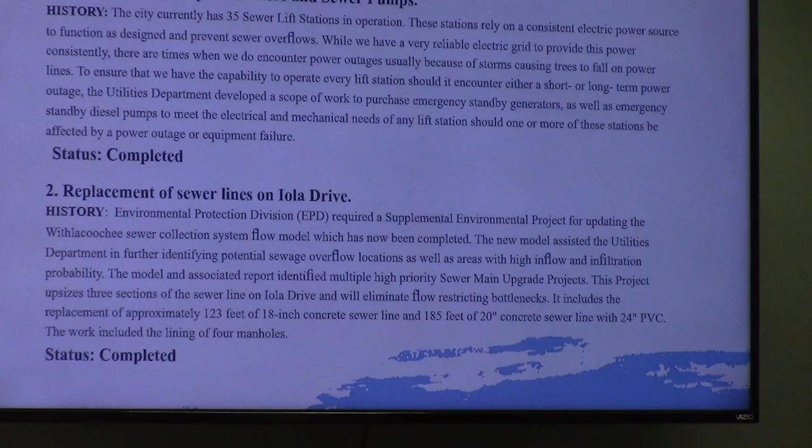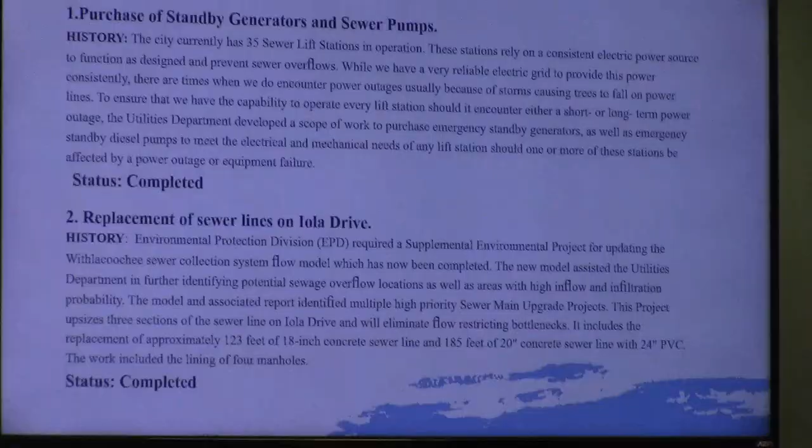As the mayor talked about earlier, this is one of our projects, and you're going to see some of them are completed, some are ongoing. I will get to the ongoing. I will give an explanation of why that's ongoing. Purchase of standby generators and sewer pumps. We have two master lift stations. One is Garnto over there at the YMCA. The other one is Reamer. It's over there in Reamerton. That's our two master lift stations.

We know a lift station is its own facility to be able to force and pump the sewer. If you ain't got gravity, you got to get it there. And that's what lift stations are there for, to force it and then get it to gravity and then go to the treatment plants to be able to treat it before it goes into the river. These stations rely on a consistent electric power source to function as designed to prevent sewer overflows.

While we have a reliable electric grid to provide this power consistently, there are times, as you can see tonight, all of a sudden it was sunshine and then it hit just like that and it's storming and thundering and lightning popping everywhere. There are times that we encounter power outages, usually because of storms; trees falling on power lines is a big one.

To ensure that we have the capability to operate every lift station should it encounter either a short or long-term power outage, the Utilities Department developed a scope of work to purchase emergency standby generators, and some we have, as well as emergency standby diesel pumps as backups. If we have emergencies on our lift station, we got a generator, and if we have to, as a backup for that, we can put a diesel pump in and divert flow. We're not having to spill. So we have completed that project.

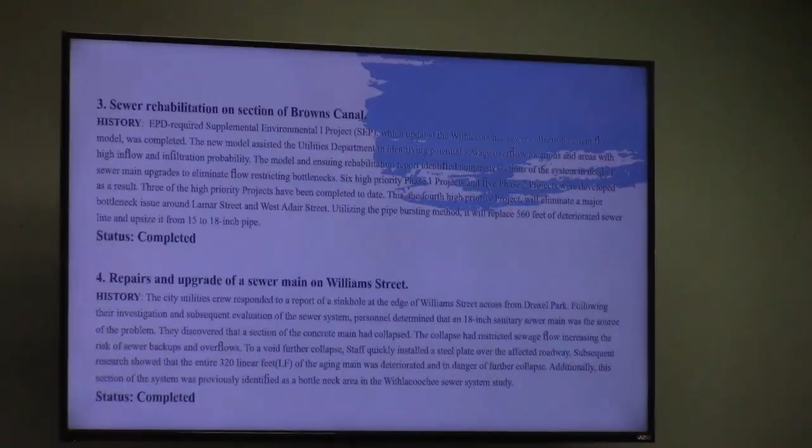Number 3, sewer rehabilitation on a section of Browns Canal. The EPD required supplemental environmental project which updated the Withlacoochee River sewer collection system flow model was completed. This new model assisted the Utilities Department in identifying potential sewage overflow locations and areas with high inflow and infiltration probabilities. You're going to see a lot of these projects; EPD required us to do a project update with a sewer collection system overflow model. So that model had to show all the areas where we were having trouble. So you'll see that a little bit.

But if you read on down to the middle, 6 high priority phase 1 projects and 5 phase 2 projects were developed as a result. 3 of the high priority projects have been completed to date. This was the 4th priority project. It eliminated a major bottleneck issue around Lamar Street and West Adair Street, utilizing the pipe bursting method, and it replaced 560 feet of deteriorated sewer line and upsized it from 15 to 18-inch pipe.

The other thing we look at, if this... projects, we'll go ahead and upgrade that size pipe, because you don't want to have an issue if you got 15, and then you're almost to the end, you ain't got no more, not getting enough flow. That's what's gonna happen: you're gonna have overflow, you're gonna spill. So that's why when we look at these projects, each one, we go ahead and update it and make it a bigger pipe.

Number 4, repairs and upgrade of the sewer main on Williams Street. They basically discovered a section of the concrete main had collapsed. This collapse had restricted the sewage flow, increasing the risk of sewer backups and overflows. The staff quickly got a steel plate over the affected roadway.

It showed that the entire 320 linear feet of the aging main was deteriorated and in danger of further collapse. Additionally, this section of the system was previously identified as a bottleneck area in the Withlacoochee sewer system study that was done, and that was completed.

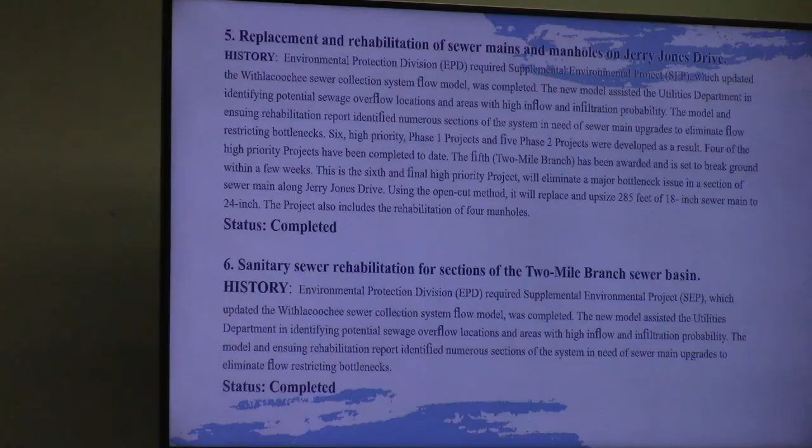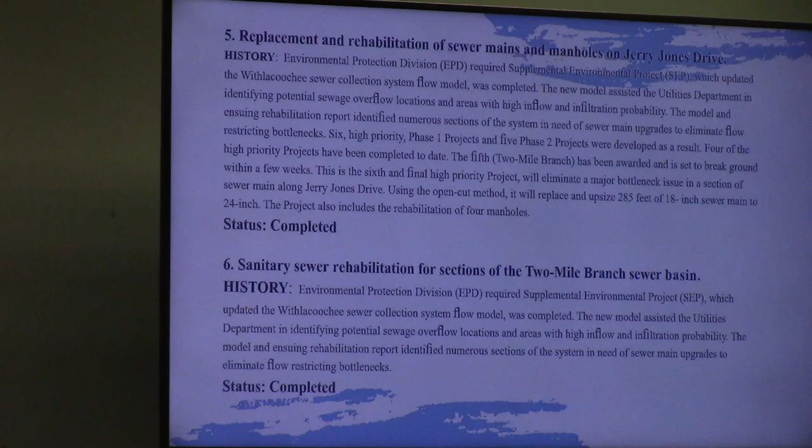Using the open cut method, it replaced and upsized 285 feet of 18-inch sewer main to 24-inch. That project also included rehabbing the 4 manholes. That was completed. Number 6, sanitary sewer rehabilitation for a section of the 2-mile branch sewer basin. Same thing was the model. The model and ensuing rehab report identified numerous sections of the system in need of sewer main upgrades to eliminate the flow restricting bottlenecks.

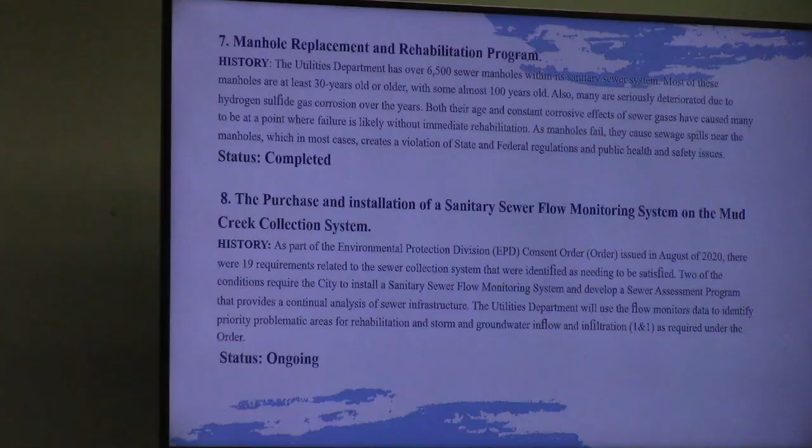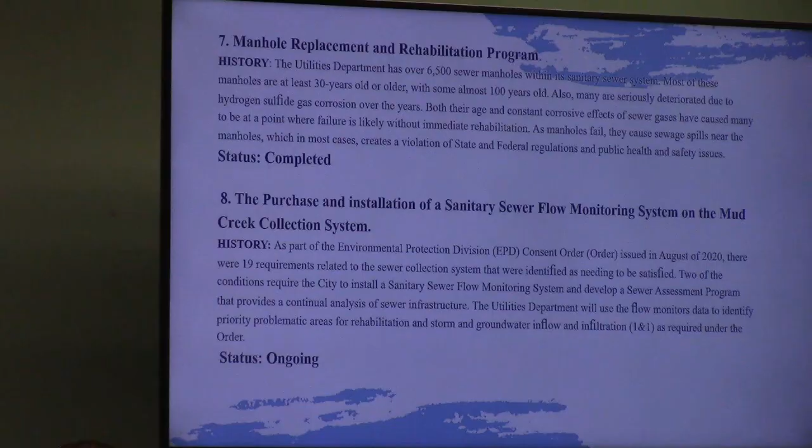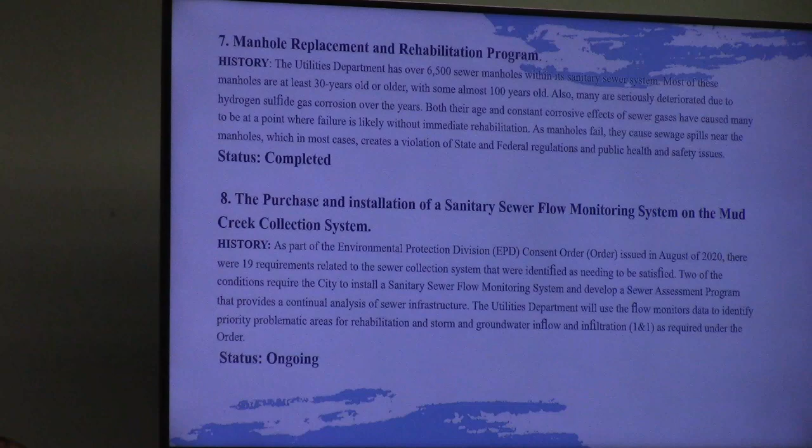Number 7, another rehab and manhole replacement. As I said before, the utilities department has over 6,500 sewer manholes within the sanitary sewer system. And here's a fact of this: most of these manholes are at least 30 years old, with some almost 100 years old. So you got 6,500 manholes, some 30 years old, some almost 100 years old, and trying to get all these lined.

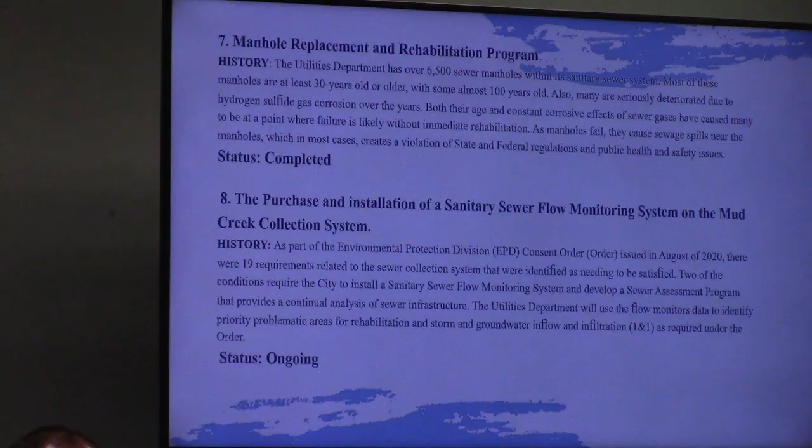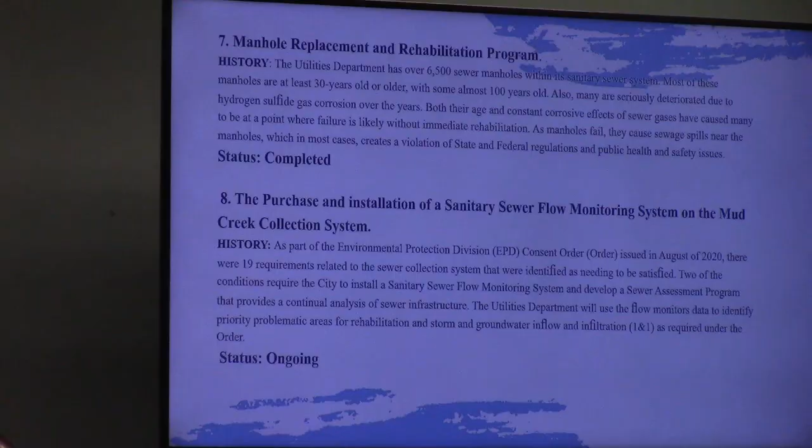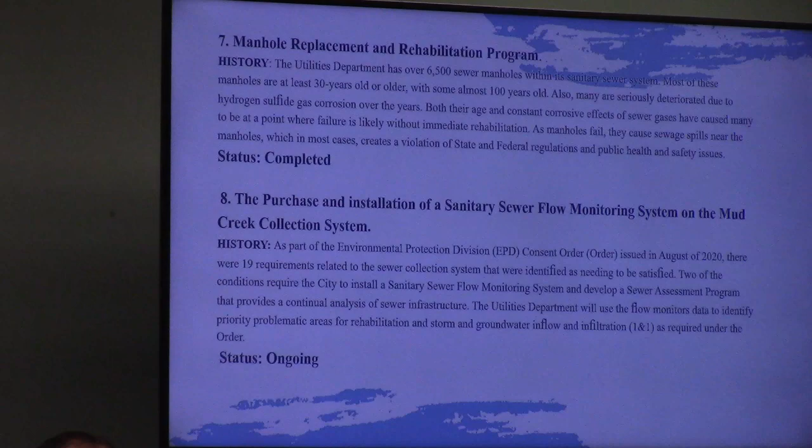If the question is asked, I will go ahead and address this. We have a manhole assessment project in place at the utilities department now. It won't be but a couple of weeks or a month or so, I'm going to take it to the council for approval. What we'll do is we'll get a contractor to go in there, and I think it's manhole number 10 is where we are. That section, we will go ahead and get those manholes back and get them lined.

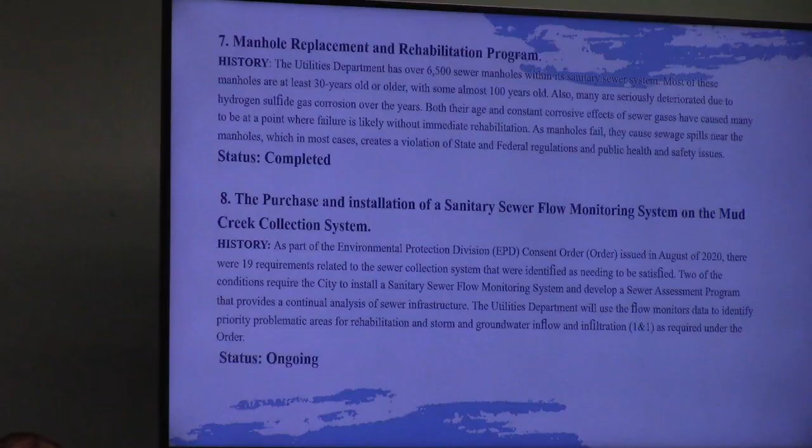The same thing with cured in place pipe. We have a CIPP number 9 project that we're on. That's another one that I'm gonna do. I got 2 separate projects: you got the line cured in place pipe and then you got the manhole. So we have an assessment survey that we have done, we know where we left off, and we're going to continue on doing both of those projects.

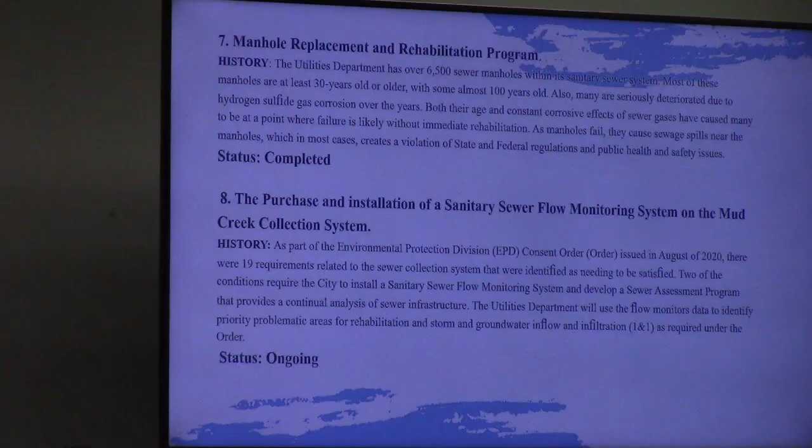So as the manholes, like I say, with some 100 years old, both their age and their constant corrosive environment, the sewer gases, are getting to be a point where failure is likely without immediate rehab. So this is one of the projects we've done that was completed.

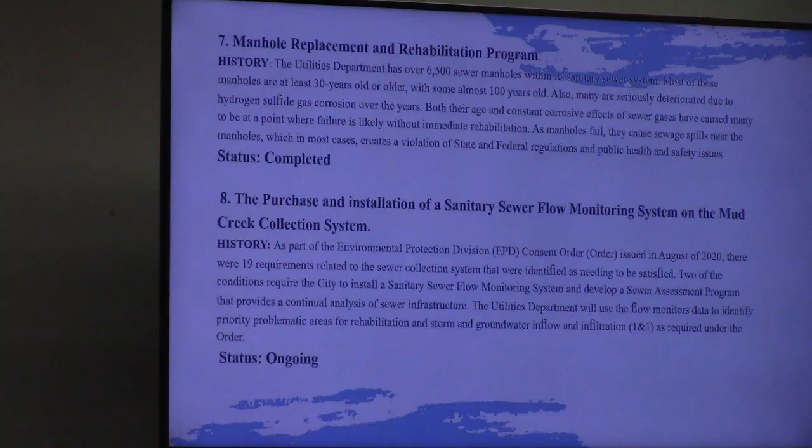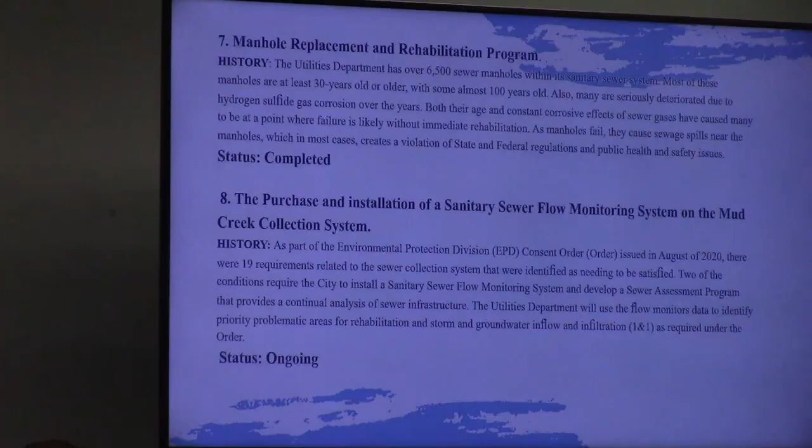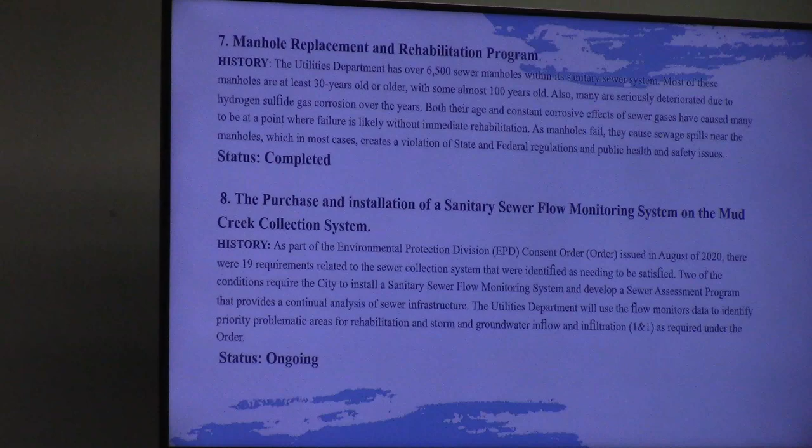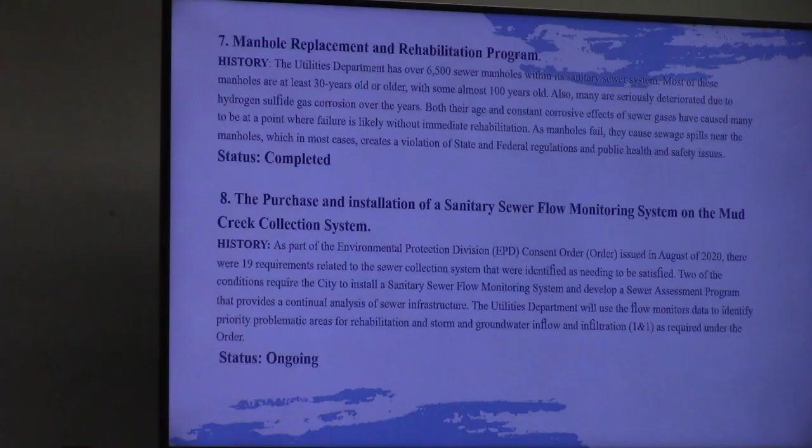Number 8, the purchase and installation of a sanitary sewer flow monitoring system on the Mud Creek collection system. As with EPD, you'll hear this, we are under a consent order that was issued in August of 2020. There were 19 requirements related to this sewer collection system that were identified as needing to be satisfied. 2 of the conditions required the city to install a sanitary sewer flow monitoring system and develop a sewer assessment program that provides a continual analysis of our sewer infrastructure.

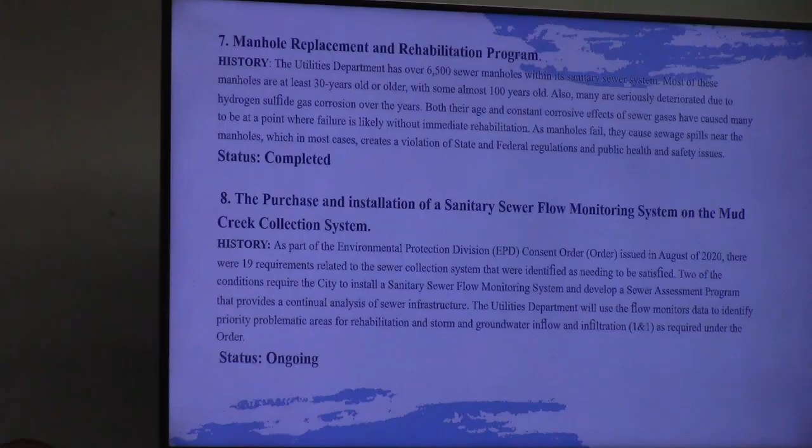And we just looked at basically problematic areas for rehab, storm, groundwater, inflow, infiltration. That was part of the consent order. I will let you know that we are in compliance with our consent order. We're still under that.

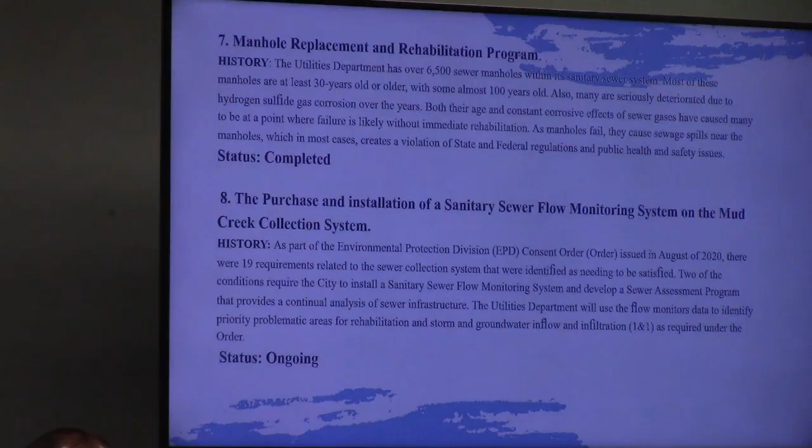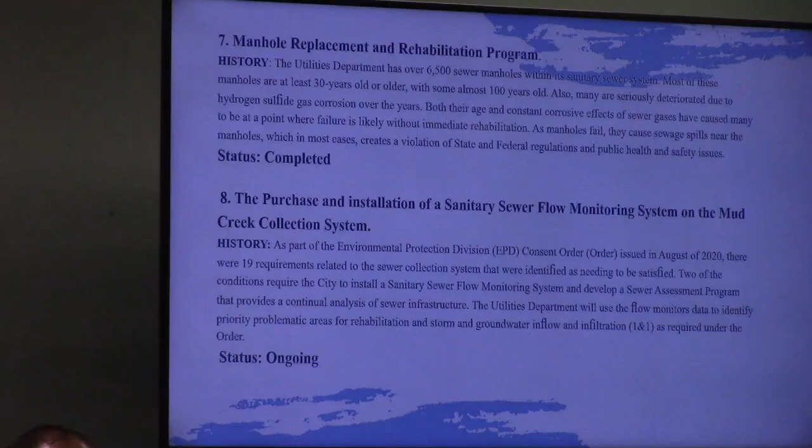We are still working with the EPD. We notify EPD when we have different issues, when we have spills, if we have an overflow, we have a minor spill, we have a major spill. All that is part of our consent order, but we are still under. My goal is in the next 2 or 3 years to get out of the consent order. That's one of the things I want to do.

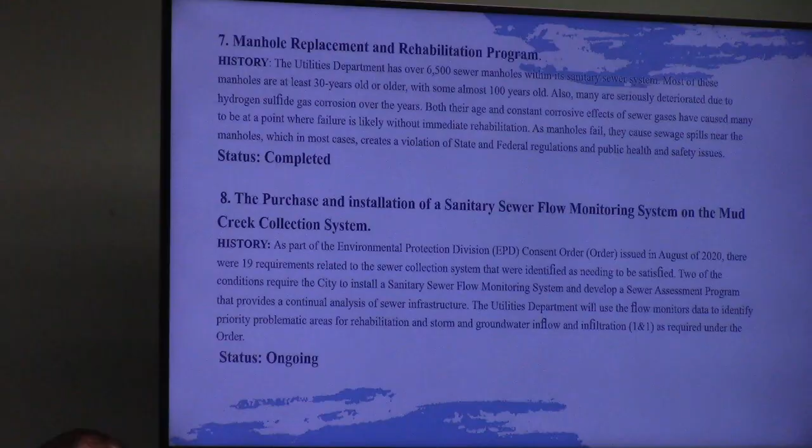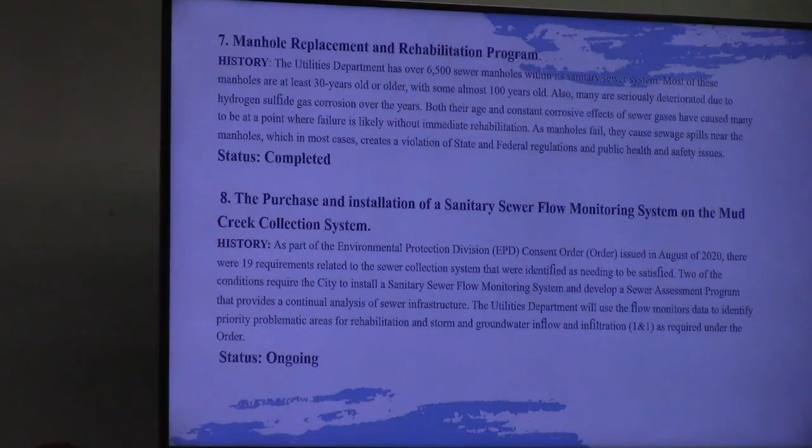And you'll see later in the slide, the projects that we have currently that have already started, in progress now, will help us get out of that consent order. So that's just one of the things. This one here is ongoing because we're in the consent order, so that's why it says it's not completed. We're gradually, with EPD, trying to get all those projects going, so that's why it says ongoing.

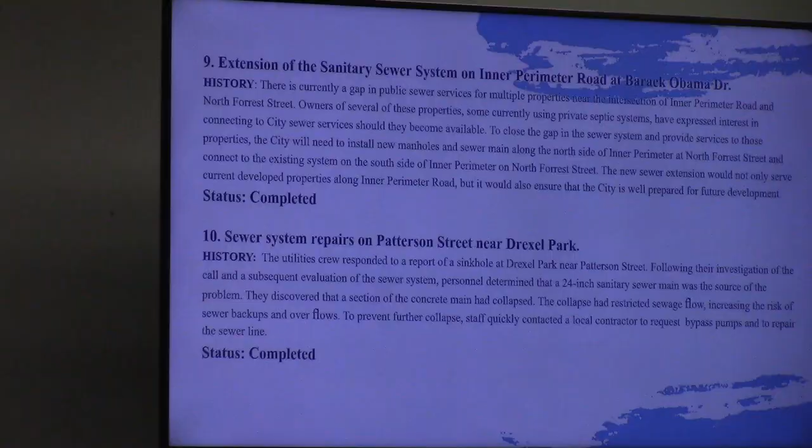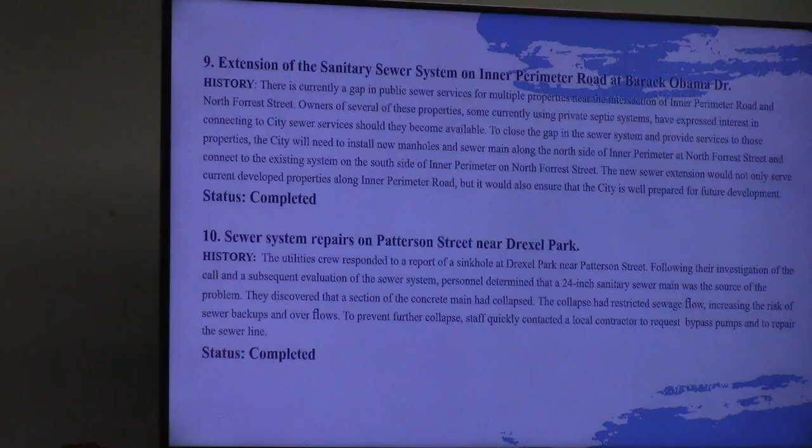Number 9, the extension of the sanitary sewer system on Inner Perimeter Road, Barack Obama Drive. The city installed new manholes and sewer main along the north side of Inner Perimeter and North Forrest Street that connected to the existing system on the south side of Inner Perimeter on North Forrest Street. The new sewer extension would not only serve current developed properties along Inner Perimeter Road, but it would also ensure that the city is well prepared for future development. That was completed.

Number 10, sewer system repairs on Patterson Street near Drexel Park. Personnel determined that a 24-inch sanitary sewer main was the source of the problem. They discovered that a section of the concrete main had collapsed. That collapse had restricted sewage flow, increasing the risk of sewer backups and overflows. So to prevent further collapse, the staff contacted a local contractor to request bypass pumps and to repair the sewer line. That was completed.

But of all these projects we're going through, there's only like 2 or 3 ongoing because of the consent order or the flow monitors, but most of them are being completed. So we just have to take the next step, and that's what you'll see here tonight.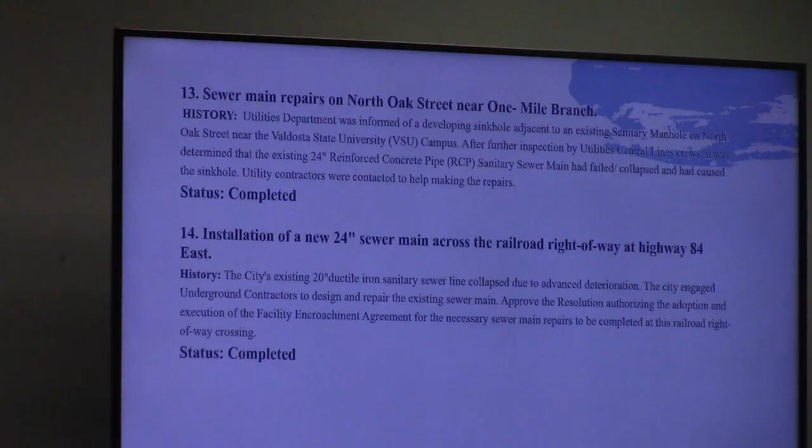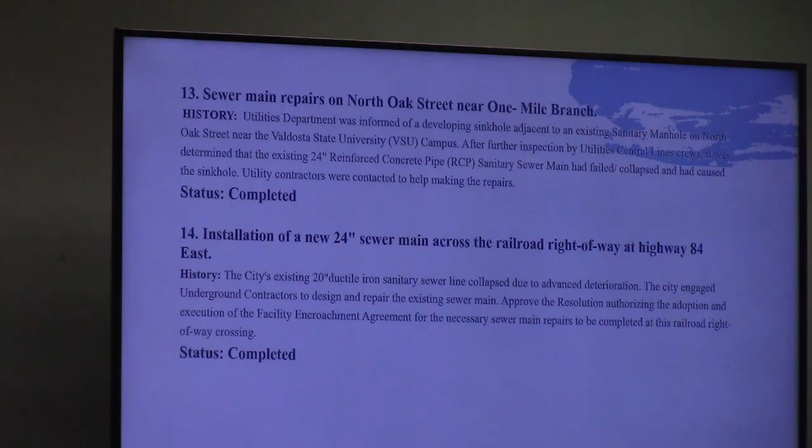Number 13, sewer main repairs on North Oak Street near One Mile Branch. This was the Oak Street near Valdosta State University. After further inspection by utility central line crews, it was determined that the existing 24-inch reinforced concrete pipe sanitary sewer main had failed, collapsed, and had caused a sinkhole. Utility contractors were contacted to help and made the repairs.

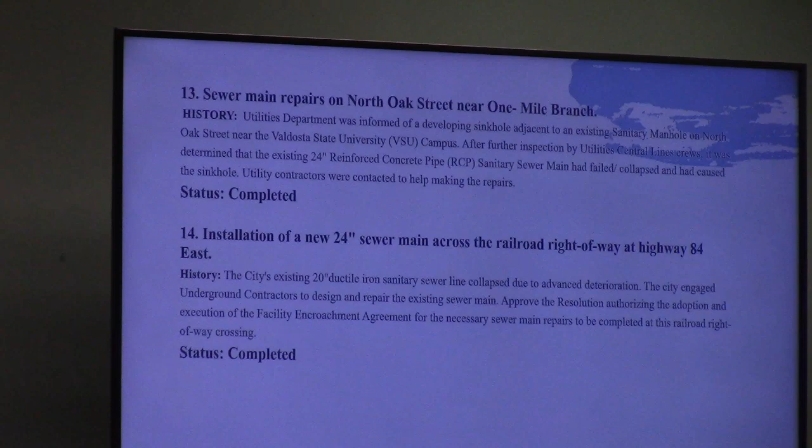The installation of a new 24-inch sewer main across the railroad right-of-way of Highway 84. This is the city's existing 20-inch ductile iron, and I'll stop right there for a minute. 50 or 60 years ago, as most of you probably know, ductile iron was good for sewer. It ain't anymore because the gases eat the top of the pipe out. If it ain't surcharged, it's going to eat it up. It has nowhere to go.

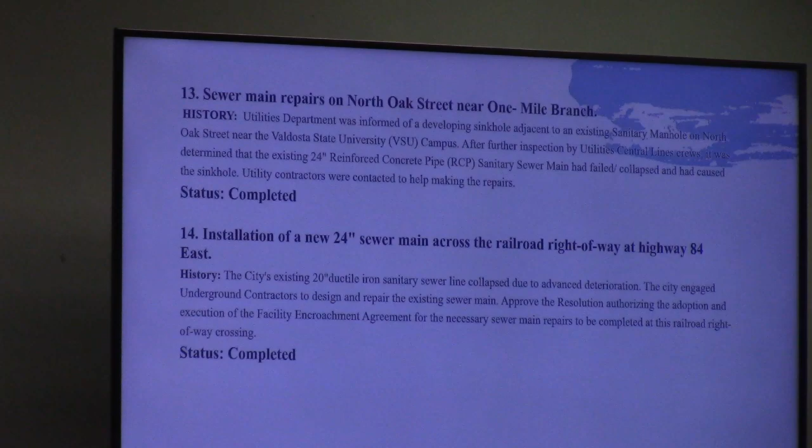If there's a gap between the top of the pipe and the flow, those gases are just eating the top of that pipe as it's sitting there because it's not surcharged, it's not moving. So that's the problem. Years ago, it was a good idea: hey, ductile iron is good. And it's lasted us 50 years, 60 years, but guess what? We're at a point where we've got to get it replaced. So that's just to let you know that.

I know probably most of you already know that, but I just want to throw it in there because most of this stuff is ductile iron, and that's the problem that we're having.

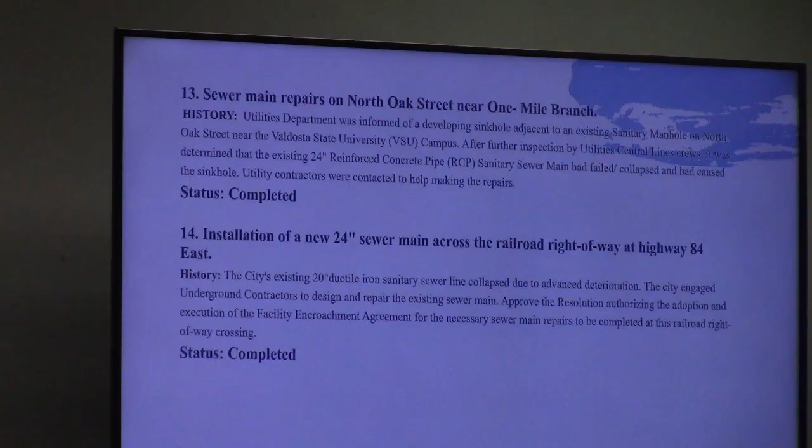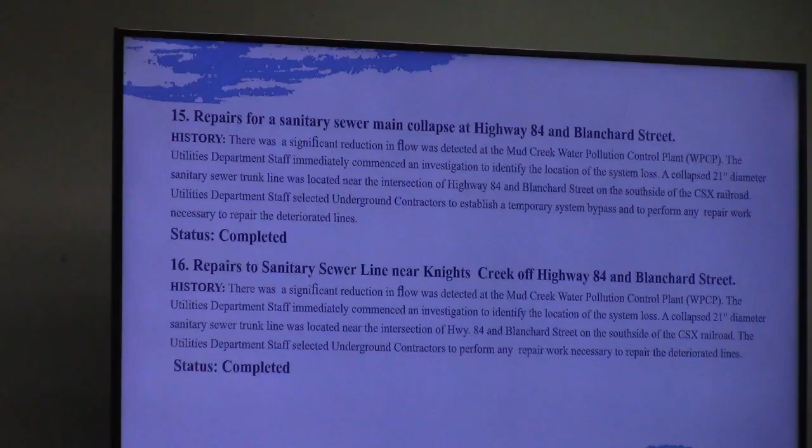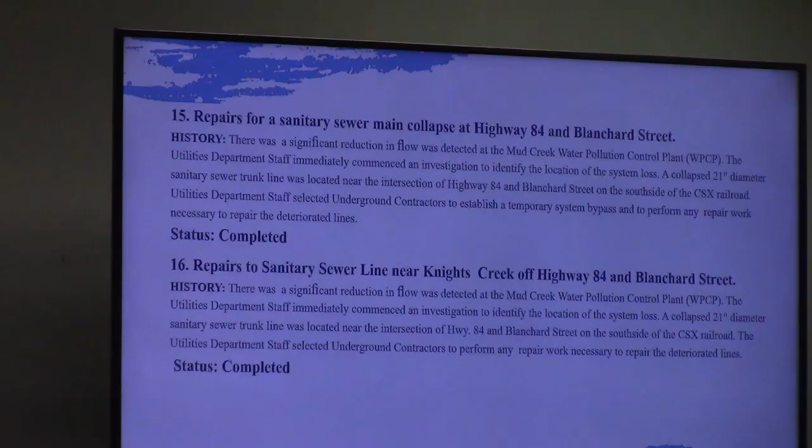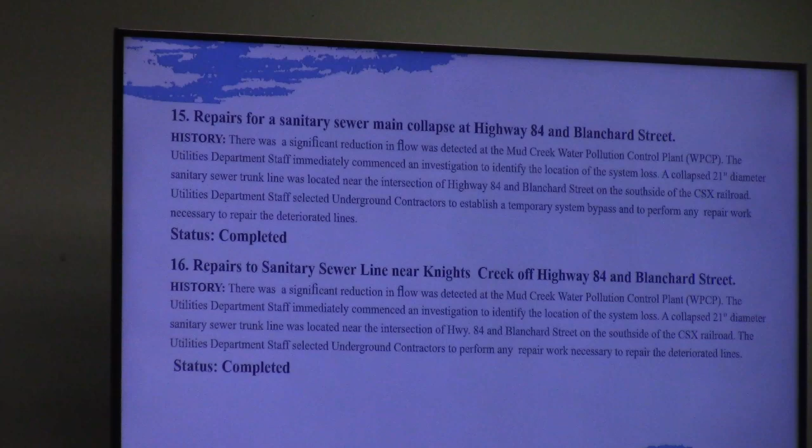Number 16, repairs to the sanitary sewer line near Knights Creek off of Highway 84. The collapsed 21-inch diameter sanitary sewer trunk line was located, same place. We selected underground to perform the work. So there's 2 different things there. We had a sanitary sewer line that collapsed first, and then we had a sanitary sewer line kind of in the same vicinity of the first one. Both of those were completed.

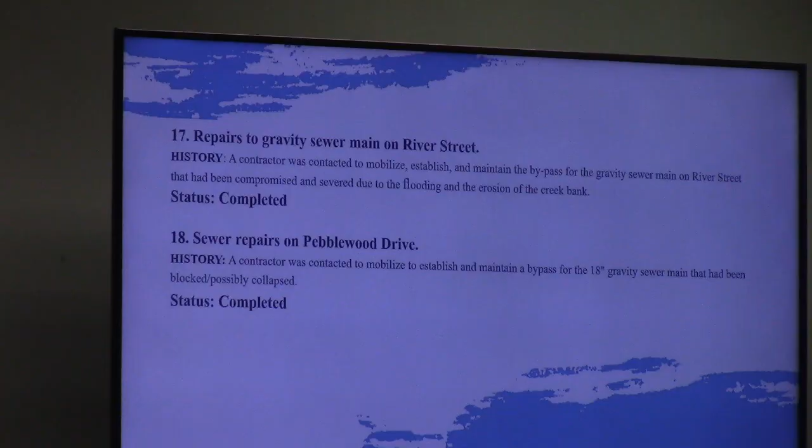On Pebblewood Drive, we had repairs. Also, a contractor was contacted to maintain the bypass for the 18-inch gravity sewer main that had been blocked, possibly collapsed. And both of those were completed. We're getting to the end of these projects, and then I'll let you know the current projects we're working on.

Sewer repairs on Knights Creek near the intersection of US Highway 84 and Blanchard. Mud Creek saw a reduction in flow at the Mud Creek Water Pollution Control Plant. Utility staff immediately commenced an investigation to identify the location of the system loss. The collapsed 21-inch diameter sanitary sewer trunk line was located, like I say, near Highway 84 and Blanchard Street on the south side of the CSX Railroad. That was completed.

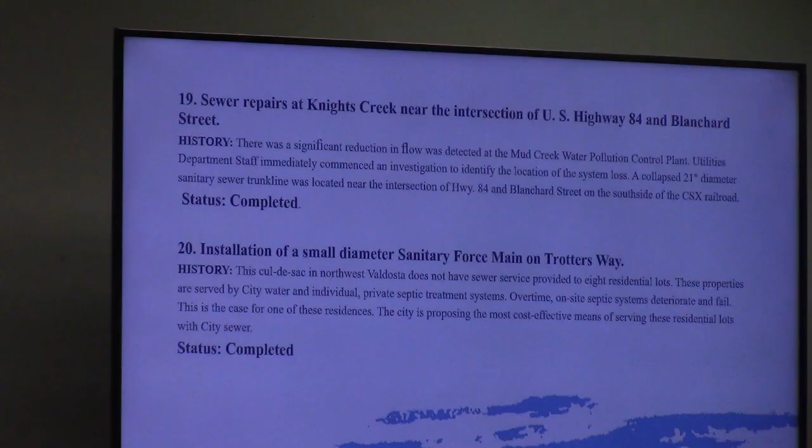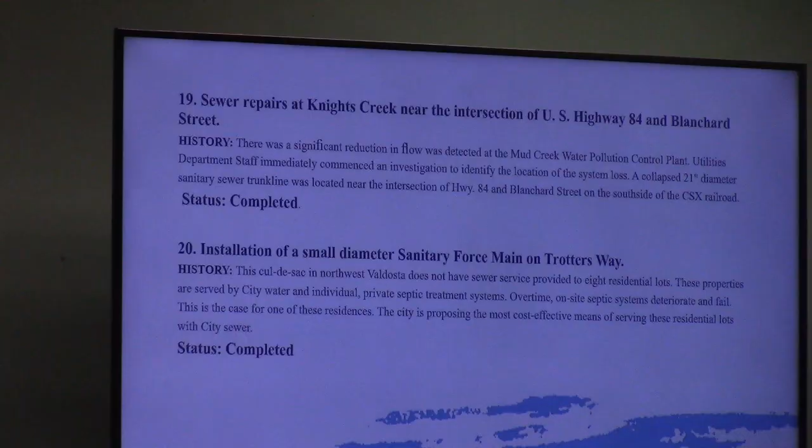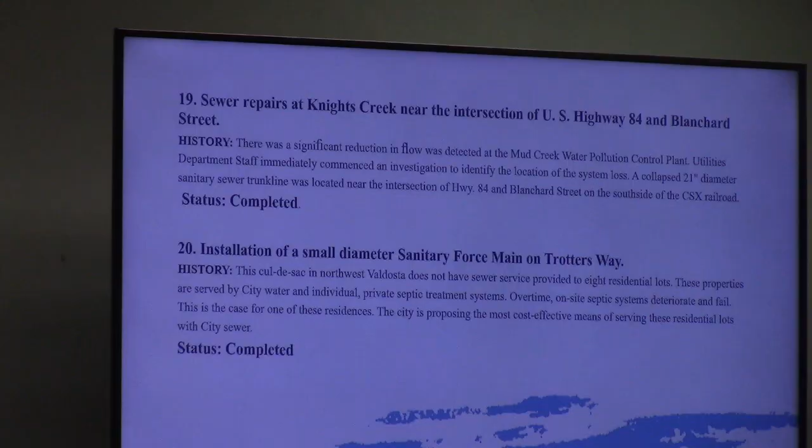The installation of a small diameter sanitary force main on Trotter's Way. This cul-de-sac in northwest Valdosta did not have sewer service available. They were on septic tanks. These properties were served by city water and individual private septic treatment systems. Over time, septic systems deteriorate and fail, and that was the case for one of these residents. The city proposed this project as a cost-effective means to serve these residential lots with the city sewer system.

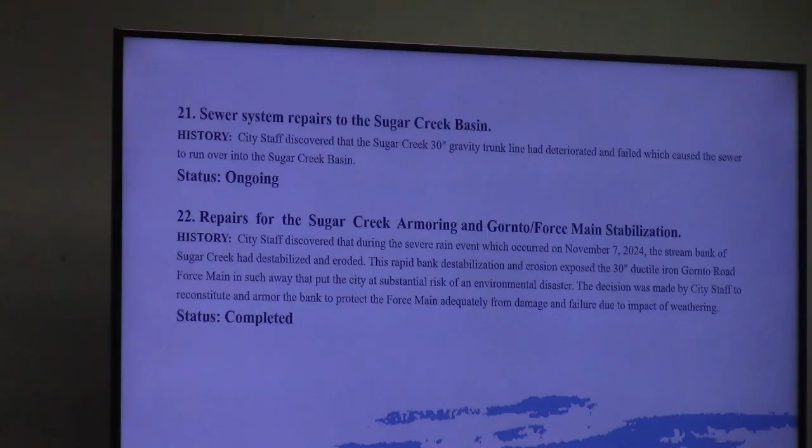Number 21, as the mayor referred to, sewer system repairs to Sugar Creek. We discovered that the Sugar Creek 30-inch gravity trunk line had deteriorated and failed, which caused the sewer to run over into the Sugar Creek Basin. Right now, and I'll say this again when we get to that slide, we're waiting on permits. It's the only thing we're waiting on. As the mayor referred to, the 30-inch pipe was in Sugar Creek.

Back years ago, that's just what they did. But now, we're going to get the right of way of the railroad track and get it out of the creek, onto the other side of the railroad, so we don't have this issue anymore. You know how, as a kid, you're supposed to learn as you grow up. As we go through this, that will take care of the Sugar Creek Basin so this won't happen anymore. It shouldn't be in the creek. It should be on the right of way, on the other side of the railroad track.

Number 21, that one is ongoing. That's the reason it's ongoing, because we're waiting on permits. And once that is, I don't know to tell you, it could be 2 weeks, it could be 4 weeks, it could be 8 weeks. Railroad, who knows about the railroad? They have their own timeline of when they want to do things, but we're all close, very close, once we get that, to go ahead and start that work and get that taken care of.

So Jason, all the materials are just waiting and ready to go. Correct. Once the permits. That's correct. Yes. The contract is ready to go. We're just waiting on the permits. So it should be, hopefully, I can't give you an exact, but it should be hopefully here soon.

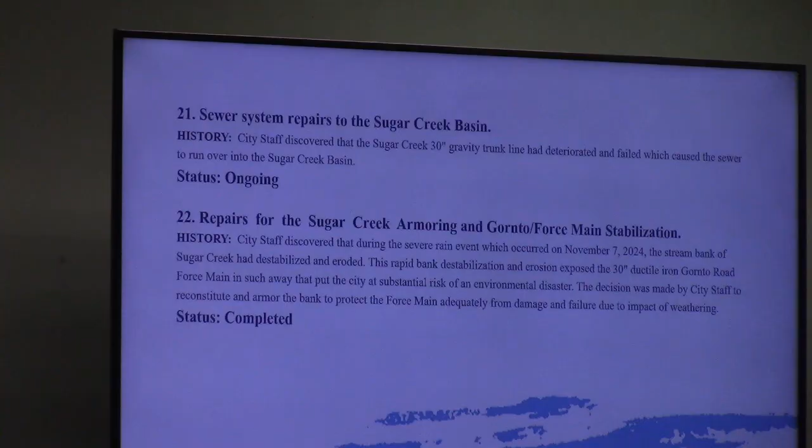Number 22, repairs for the Sugar Creek Armoring and Gornto Force Main stabilization. This was in November 7, 2024. I said the 11th, so I was wrong. It's November 7th last year, so I was close. But the 7th, when we had the rain, that's when all this happened with the Gornto Force Main.

Basically, the riprap bank, it just deteriorated and was gone. The whole thing, you can see the thing sitting there, a 30-inch ductile iron. So this was part of the project. City staff, we got a hold of the contractor, got there and got that taken care of. So this job was completed.

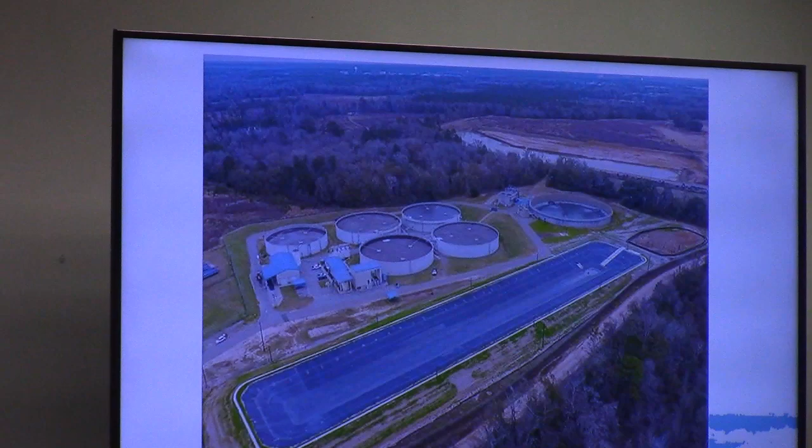I will say, the rain events, the hurricanes, and I'm not making excuses. I'm not. I know we have problems. I'll be the first to tell you that. But when we get 17 inches of rain on November 7th of last year, in not even 30 hours, 17 inches of rain, what are you going to do? There's not much you can do. And Hurricane Helene hit. Tropical Storm Debby, we had that one. We had Idalia. So it's been back to back to back the last year and a half, 2 years, that it's like we can't get a break.

But it's not going to stop us. What you can control, you can control. God Almighty, it's going to happen, it's going to happen. But I can tell you we're in a better place of working with our city leadership and our department leaders in our city, with engineering and the operation for my side, working together on these projects to make it better. These are the capital sewer improvements schedule that we have.

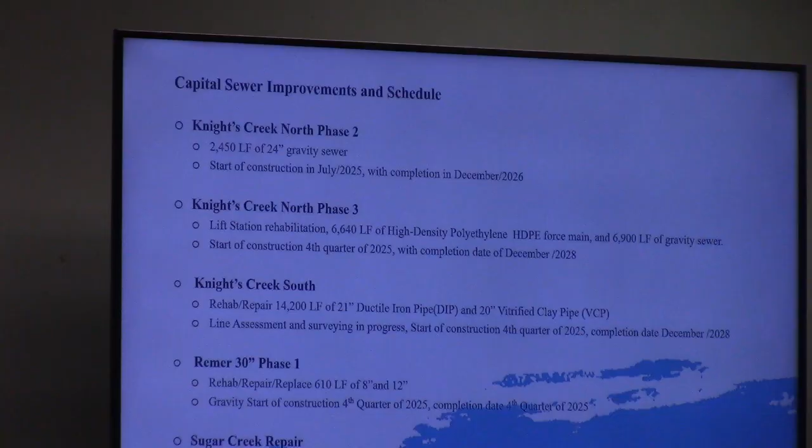As the mayor mentioned, a bond we took out for $69 million to get these projects back in work. One is Knight's Creek North Phase 2. Phase 1 was already done, this is Phase 2. 2,450 linear feet of 24-inch gravity sewer. Construction has already started with completion in December of 2026.

Some of these dates are like, man, it's taking a long time. Well, by the time you get surveying, like I said before, you get engineering, and you get everything together, and you get what you need for pipe. We know how ordering things goes. It depends on what you're getting. If it's electrical, it's just more, but that's Knight's Creek North Phase 2.

Then there's a Phase 3 of Knight's Creek North. That's going to be 6,640 linear feet of high-density polyethylene, which is HDPE force main, and 6,900 linear feet of gravity sewer. Starting construction of that fourth quarter. We're supposed to be in fourth quarter here shortly anyway of this year, with completion date of December of 2028.

Knights Creek South: rehab/repair 14,200 linear feet of 21-inch ductile iron pipe and 20-inch vitrified clay pipe. Line assessment and surveying is in progress. Start of construction is the same as Knights Creek North Phase 3, fourth quarter of this year, completion date December of 2028.

Remer 30-inch Phase 1. Rehab, repair, replace 610 linear feet of 8-inch and 12-inch gravity. Start construction is fourth quarter of 2025. Completion date fourth quarter of 2025. The reason that's so short, you look at 610 linear feet. Well, if you look at the other ones, it's 6,000, 14,000. So there's a big difference there. So that's why it says start fourth quarter and completion is fourth quarter as well.

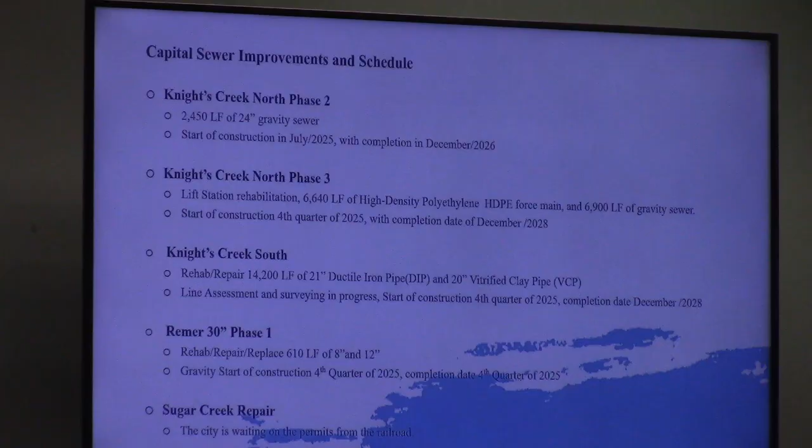So we had to do what Mud Creek had to be. Ken Lowe, he's the superintendent of Mud Creek, he's here tonight. 3.2 to a 5.7 MGD. You got industrial users that are still, hey, we want to see it grow. Bring them in, but you got to make sure you can take care of them when they come too. And so that permit had to change.

Withlacoochee was in the bottom. You know, it was flooded twice, 2009, 2011. We had to get the headworks up on top of the hill. And then that's when we added in 2021 the second basin. So we have spent over $160 million from 2009 to 2017. From 2018 to 2025, not counting these projects that we're currently doing, we have spent almost $20 million.